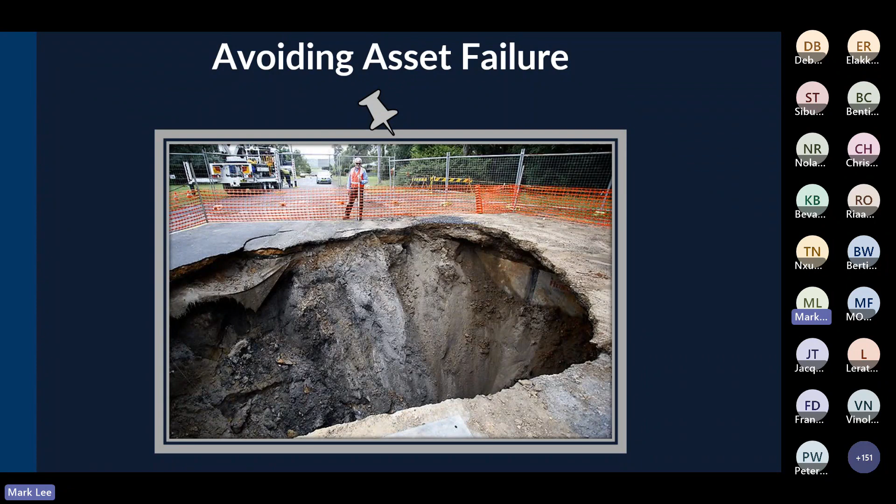In the past, engineers have often felt like they didn't have enough data to understand their assets, networks, and the processes that they were tasked with managing. What we've seen is a rapid development in hardware, capability, and communication options to bring data back in from the field faster than ever. We now have access to so much data that it's easy to suffer from data overload. Artificial intelligence can assist with its capability of rapidly processing large amounts of data, help make decisions, and provide advice.

A real-world example of data analysis and predictive modelling is having sensors installed in a pump control cabinet to capture, process, and relay detailed performance data. The example sensor here is one of the ones from the Dutch company Samotics, who work across a range of industries to improve predictive maintenance and reduce unplanned downtime across a range of assets.

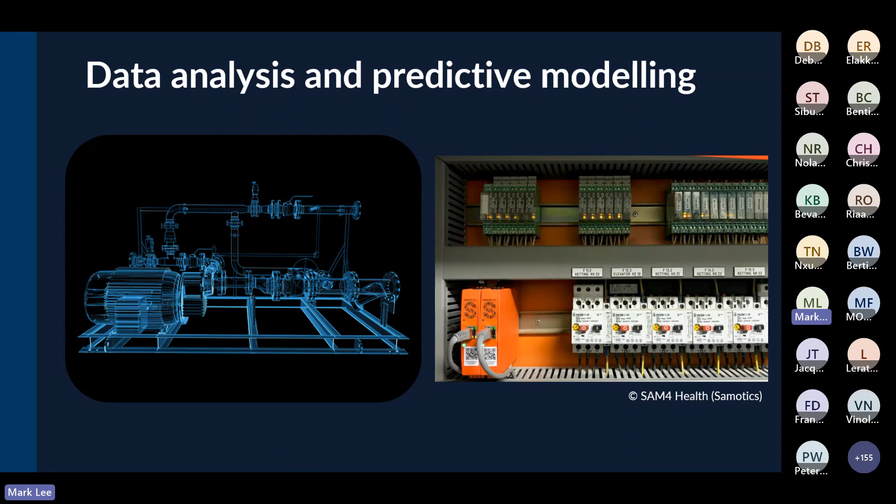Products like this look to build real-time pump curves, notify a failure, detect anomalies to auto-adjust pump control, and flag the presence of leading indicators of early signs of pump failure.

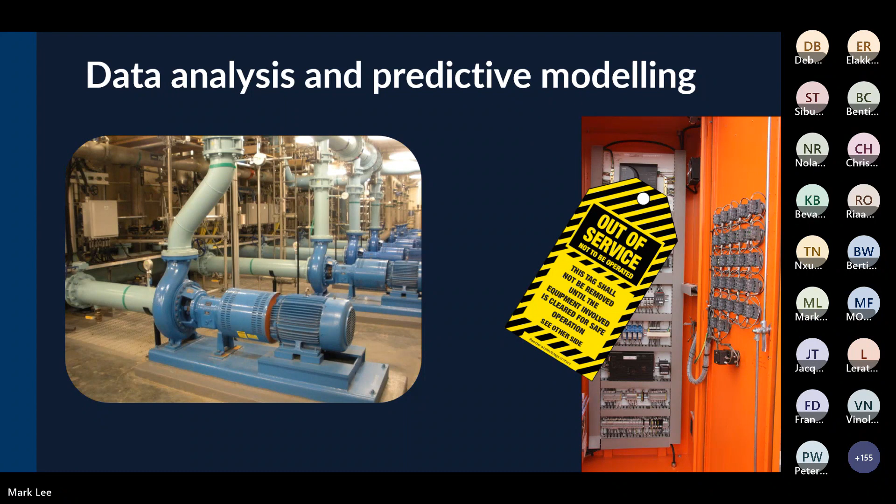The hardware to detect leaks in water networks through acoustic signatures has been around for many years, as has telemetry alarms that monitor sewer levels. But what has evolved in recent years is a reduction in the amount of time and resources required between an event occurring and turning it into a triage job that can be prioritized against other work.

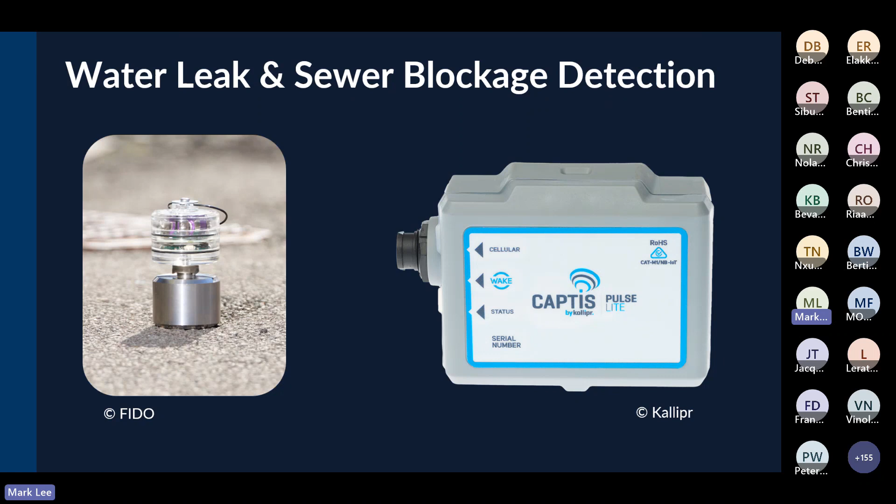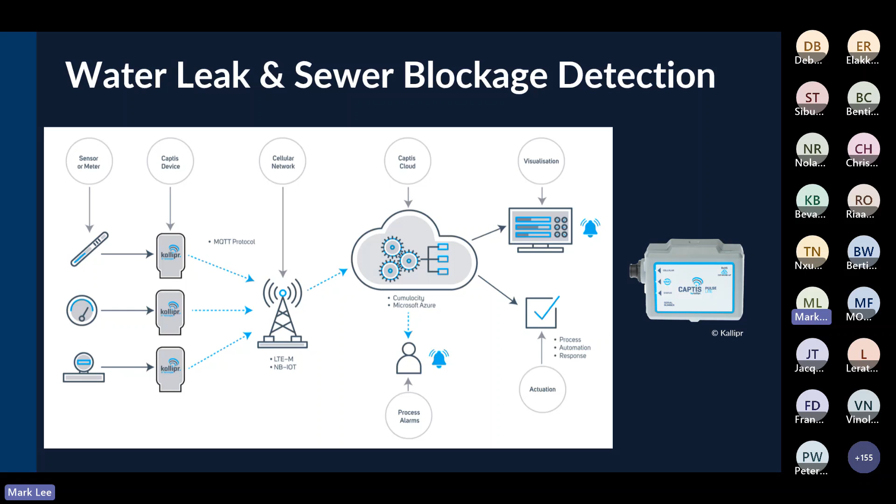The interactivity between different systems using cloud-based data storage, APIs, and defined workflow rules means organizations can now begin to create automated workflows that get crews out rapidly to the problems that need fixing first. The manual generation of paperwork and work orders is reduced, and there are opportunities for better results, including improved levels of service, environmental impact, and cost.

Artificial intelligence is being used to help refine and optimize digital twins of networks. This also includes the fine-tuning of water and wastewater treatment plants. Automation and AI is now able to help assist in the design of treatment plants as well.

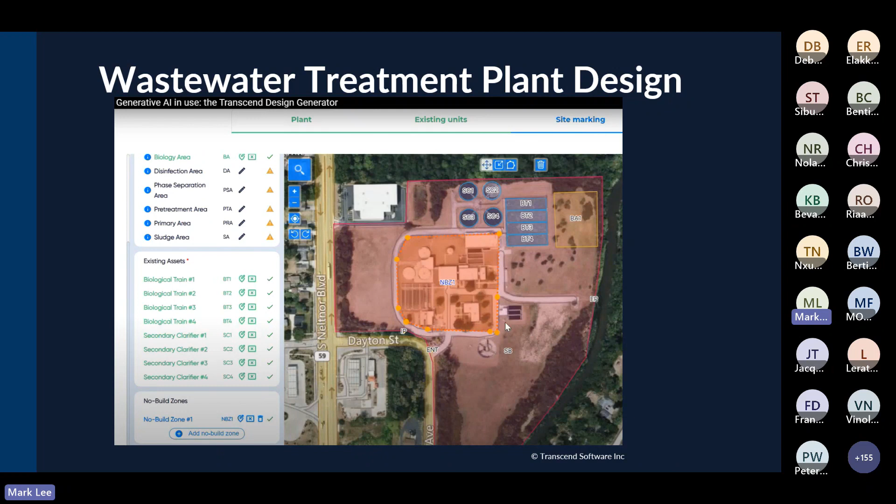This example is from a US company called Transcend, who are able to take process requirement inputs, including influent flow parameters, preferred treatment methods, existing processes, site footprint, and more to generate design documentation for wastewater treatment plant upgrades.

This image shows one of the interactive screens where users can mark out the inflow and outflow points, areas where there are existing assets, and the land where there may be no build zones or preferred locations for future build areas. Sorry for the grainy quality of this one here, I've just compressed it into a GIF for this presentation.

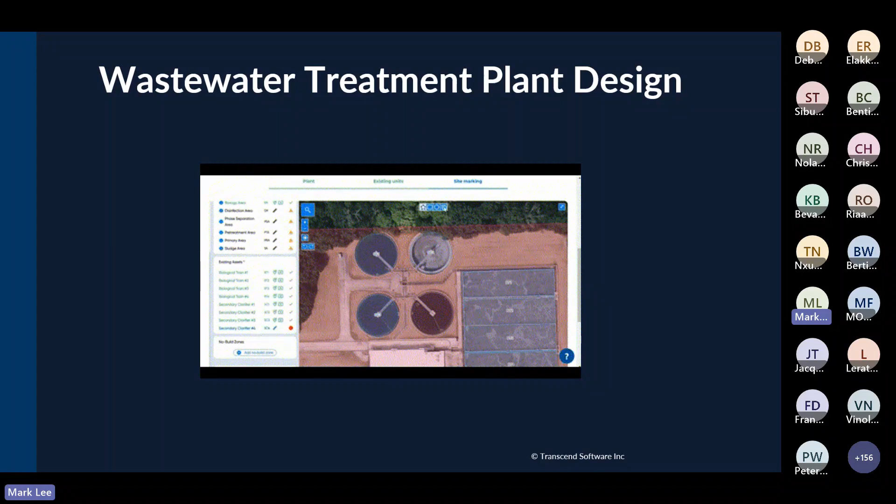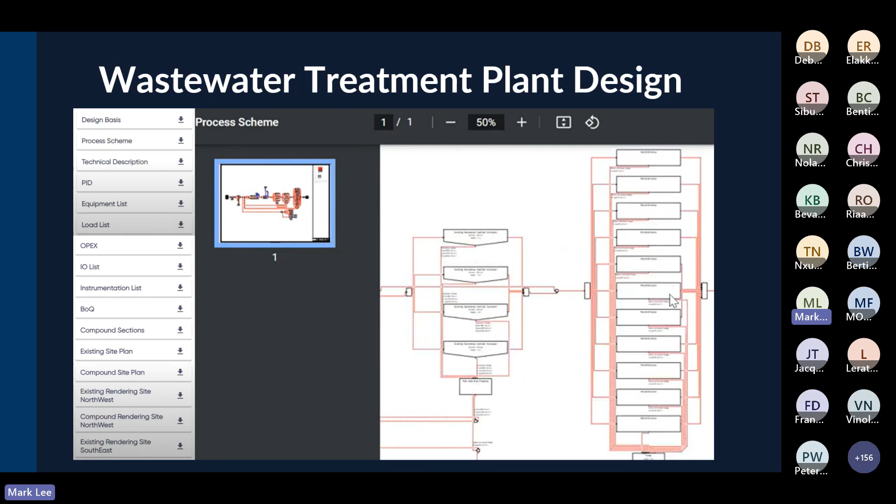The output from this type of design generator is a document package that includes a wide range of concept design materials, from process schemes and piping and instrumentation diagrams through to BIM models and AI rendering of the design, like we see on this slide.

My area of expertise isn't in process engineering. I've spent much more time managing network assets such as water distribution networks and sewer collection systems. So I'd like to go into some more detail on the asset management of gravity sewer assets and how I see AI fitting into this space at the moment.

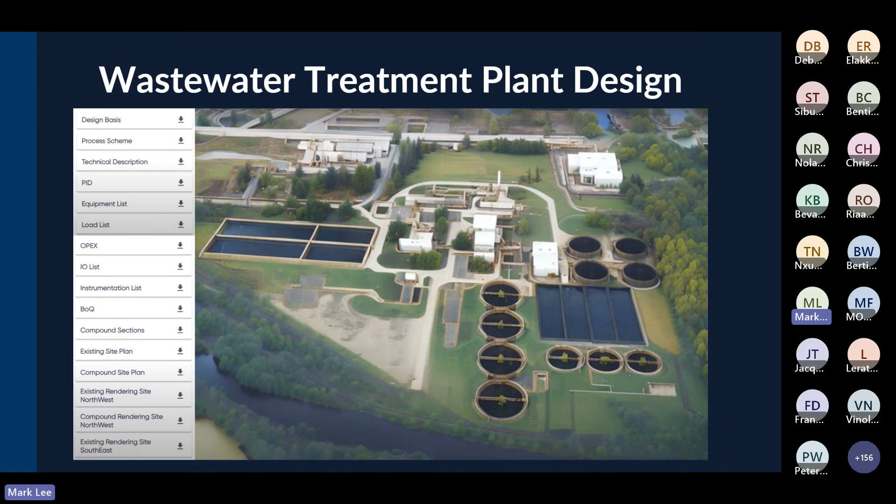Managing pipes that are in poor condition has often been split into two discrete components, often completed by segregated teams: the collection of CCTV footage and calculation of condition grade, and then making a decision and scheduling the maintenance or the rehabilitation of pipes.

A common barrier that we've experienced and seen is moving efficiently from this initial pipe inspection stage through to the action on the ground stage. The purpose of inspecting pipes isn't to get a condition grade in a report or watch a video. The purpose is to drive sensible asset management decisions on what to do with at-risk pipes and allocate budgets in an optimal way.

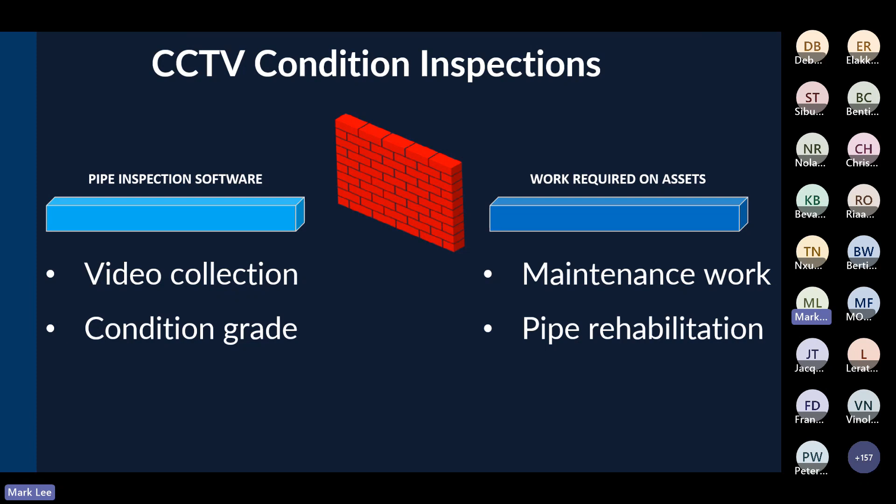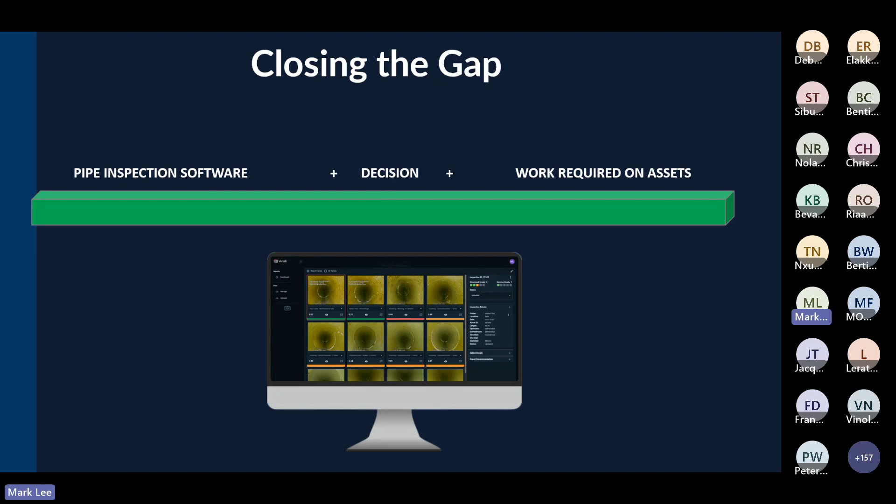AI can also help engineers with this task. VAPAR's cloud-based platform is designed to extract information directly from the video and pull data, images, and engineering logic together onto a single browser screen. It's designed so an engineer can view the condition of their pipe, make a decision, and prepare work packages using a fast, accurate, and more consistent approach.

It removes the requirement to sit through all of the long inspection videos before being able to reach a decision, and it focuses a person's time on the engineering tasks that really matter.

When speaking to people about artificial intelligence, there's often some curiosity about what's taking place in the actual AI model. It's not intended to be a black box or some secret process. We only need the video file itself to produce our results, and there's no need for the inspection to have any defects coded during the inspection. So let's take a look.

Upon upload, each video file is automatically split into a series of still frames. The AI analyzes each of these frames, and based on over 100,000 machine learning training images, it checks each frame for the presence of a pipe defect and then categorizes these results to align with regional scoring standards.

If we take a single extracted image as an example, it will be processed in the primary AI model that determines if a defect is present and then what category of defect it might be. The image will be passed to one of many different defect submodels, in this case the root submodel, which is tasked with classifying root type and magnitude.

The output of the processing will be an image with the label and relevant defect scoring applied. This same process happens for each and every frame, with the end result being all relevant images from the inspection presented, scored, and highlighted for the user.

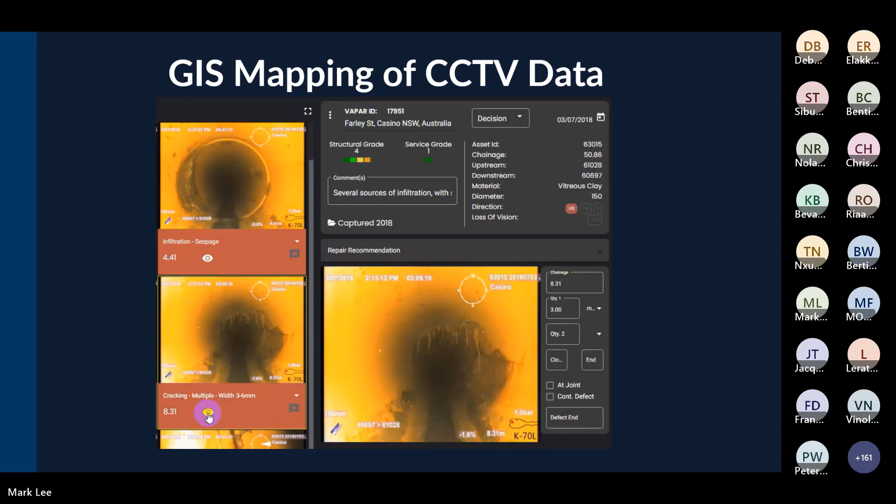This combination of artificial intelligence and automation is intended to drive optimal decision-making at an individual pipe level. It then flows directly onto a targeted program of maintenance and capital works.

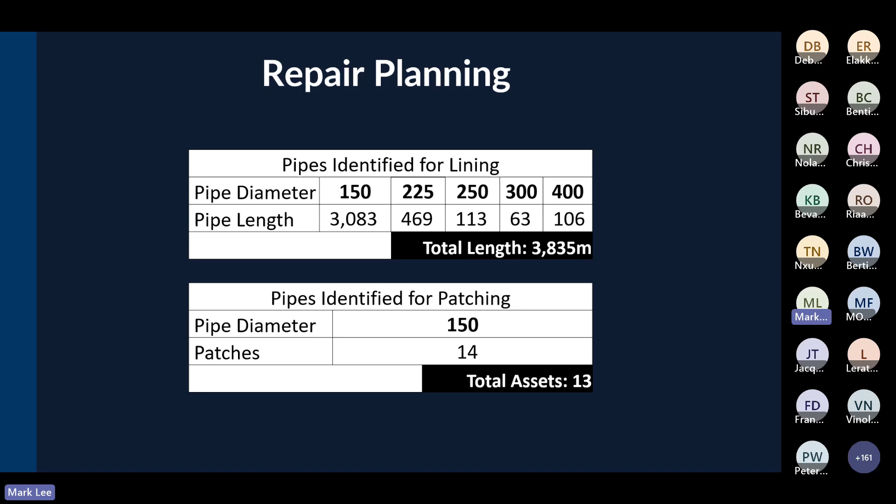It only takes a minute to go from the repair recommendations export from the previous slide to this repair planning scenario for every single pipe in the system that has been reviewed with a decision allocated. This example shows aggregated decisions totaling around 4 kilometres of lining work and 14 patches across 13 pipe assets for an upcoming work package.

Costing can be inserted into the repair planning based on the current schedule of rates if you have a civil works contractor or a panel, or you could use your last project's pricing or make some calls to arrive at an indicative budget estimate.

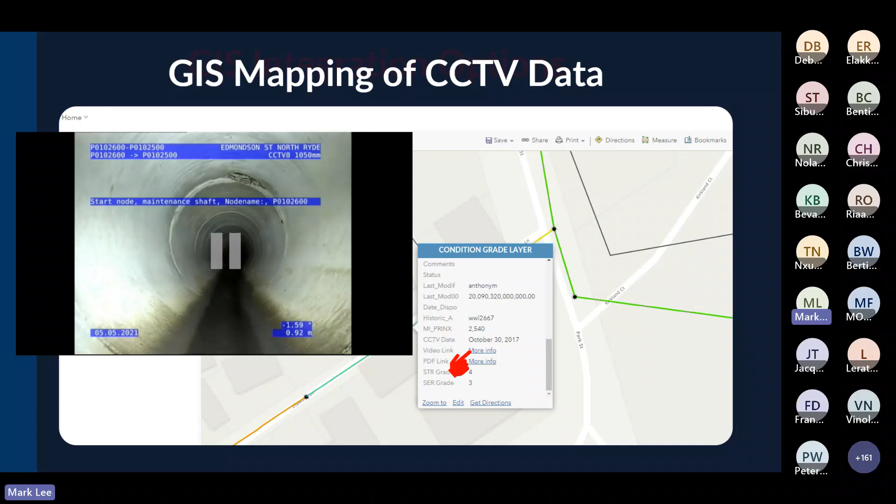While we don't have time to go too deep into thematic mapping of results, these results from VAPAR can be integrated into a utilities GIS platform. So the layer here shows which pipes have been inspected with information including date of last inspection and condition grades. Hyperlinks allow videos and inspection reports to be opened with a mouse click. The video is able to pop up in a browser window and play directly from the cloud storage location.

Other useful data that can be shared between VAPAR and an organisation's GIS is a point layer with the defects from every inspection and their location along the pipe.

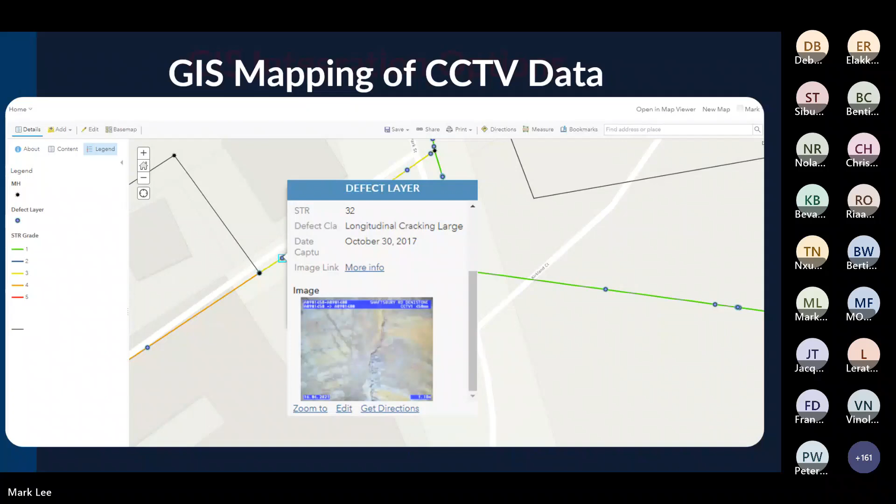So the world of pipes and pipe inspections also produces some pretty unique and weird situations. During our AI processing, we also come across all sorts of wild images. So we post on LinkedIn every Monday morning with examples of the strange and the weird that we find in pipes, and it's a light-hearted way to start each week.

So from here, I'll pass over to Elakkia, who is well qualified to take us even further into AI and how it fits into the sphere of engineering.

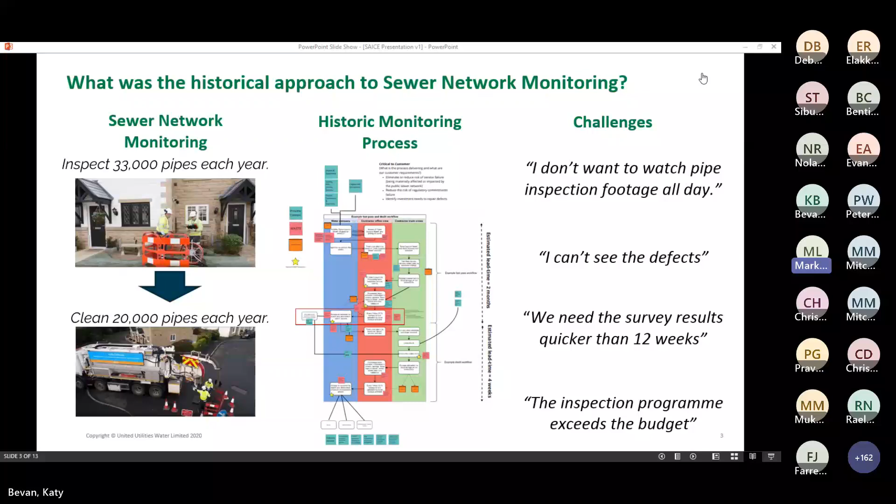Some of the challenges are... Katy, yeah, very sorry to interrupt, but there's been 3 or 4 people sharing that they're not able to see the presentation. I can see from my side. Oh, interesting, okay, so I just want to double check it. Have a look what we can do. Perhaps just stop share, reshare. It may be at their end, but I just want to make sure there isn't a large amount that can't see. Sorry, yeah, no problem, thanks for letting me know. Let me reshare, looks like it might have just been a couple. Yeah, okay, no problem, I'll reshare via my screen. Is that back for the majority? Yeah, we're all back up. Very sorry to interrupt you there. Excellent, no problem at all.

It's funny because you feel like you could be talking to yourself, so it's good to actually hear a human voice back. Okay, so some of the challenges - we don't want people sat watching pipe inspection footage all day, of which some of my team were doing for a large majority of their day. Obviously, that seemed completely nutty to me when I started this role. Couldn't believe that we were in this place where this was still something that happened. And also, additionally, they couldn't really see some of the defects that well.

Apologies if there's a little bit of background noise, but I am on a wastewater treatment work, so there's a lot going on around me, but I'll continue. So they couldn't see some of the defects, they weren't that visible. And also the process from on-site completion of the CCTV being carried out to actually understanding what we needed to do was sometimes taken up to 12 weeks. Depending on the risk there, that's way too long for us to wait and get that visual and define exactly how we can progress with that.

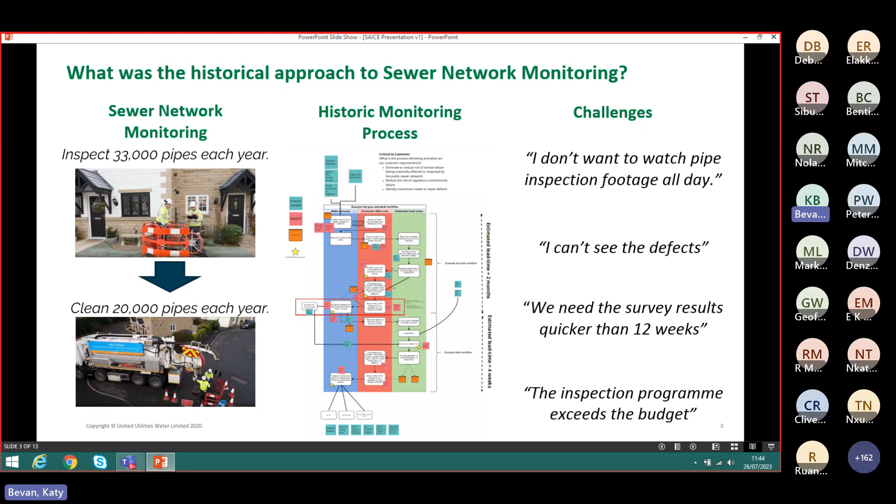Additionally, the inspection programme - I have a certain budget that I have to inspect all of my sewer pipes, and we were actually exceeding that budget year on year. So what ended up happening is that towards the end of the year, usually the last quarter, the inspection programme would sometimes just completely stop because we did not have the money to progress that. There was no risk element to that, no review of what the important pipes were within that quarter. It was just a cut-off period because we didn't have the money, which is absolutely not the way that we want to work things.

Okay, so Innovation Lab. I don't know if anyone's heard about the Innovation Lab at United Utilities, but innovation is core to who we are, part of our culture. What we do every year, and we have done for the past 6 or 7 years, is invite suppliers - smaller suppliers, larger suppliers - from every country across the world. There is no categorization of who can apply and who can't, it could be absolutely anyone. If you've got an idea, apply. And if you get through, you can basically use our data, our people, our systems, our assets, whatever you like, as a test bed for that supplier to understand how they can get the best out of their tech or product. And obviously it's a two-way street, because we're also getting the benefit of understanding and being first in line for that product and seeing how we can benefit from it ourselves.

The ideas range dramatically. We've had things like sniffer dogs for leak detection, which has been a massive success for us on the water side. And additionally, VAPAR, which came through our innovation lab about 3 years ago. Amanda mentions one of the CEOs from VAPAR, that the reason why she started the company was because she was one of these people following graduation who was sat watching CCTV pipe inspections and couldn't believe that that was the way we were doing things.

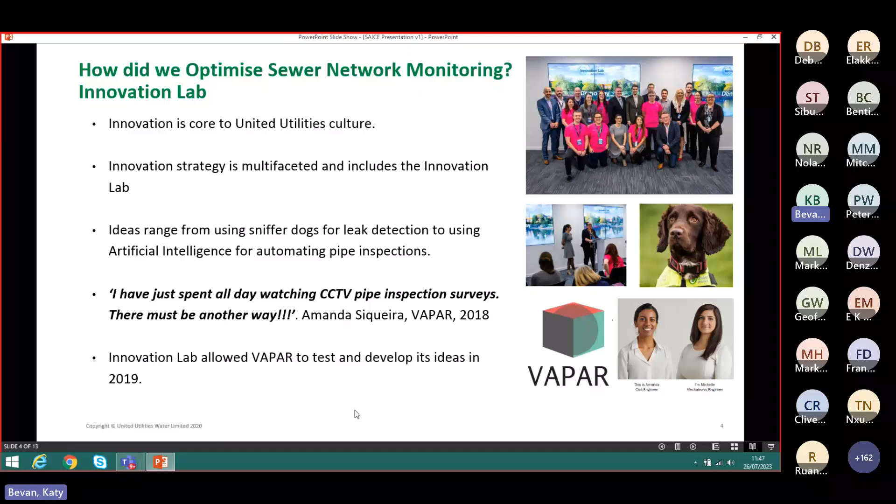Just a note on that as well, I don't know if it's the same across the globe, but we sometimes find that suppliers struggle to get into the water companies, so it seems like a closed door sometimes. They struggle to know who to contact. It's such a big company, who do we go to to get in there? The Innovation Lab gives us that perfect opportunity for people to come in, so it's something I really enjoy being part of each year.

So how did we optimize the sewer network monitoring with VAPAR? I know you've seen some stills from Mark around what the actual system looks like, but what the AI does for me is categorize the inspection footage.

Historically, what used to happen was we had the fast pass element where we looked at the sewer pipe, cleansed it, and then did a structural survey after the cleanse. The structural coding was carried out by one of my contractors, all done on site. There are so many different codes, so many different defect types, thousands to select from. There's a lot of opinion there, lack of consistency, weather plays a part in that, someone might be having a bad day. It was very difficult to understand the accuracy levels we were getting and that consistency.

Consistency is key to make sure we are correctly understanding our risk and managing that appropriately. I need to ensure the correct defects are being located in the correct locations, so we can ensure the right remedial activity is selected for that specific defect to resolve the issue properly.

So talking about how easy the system is for us to use - the mobilization is very quick, and from an output point of view we can easily extract a PDF report that gives really good visuals of the defects, what they are, and what the remedial solution is. We can then give that to our relevant engineers in our teams, who can put that forward for funding to get resolved. Don't expect to see all the detail here, but that was the old historic approach I showed earlier.

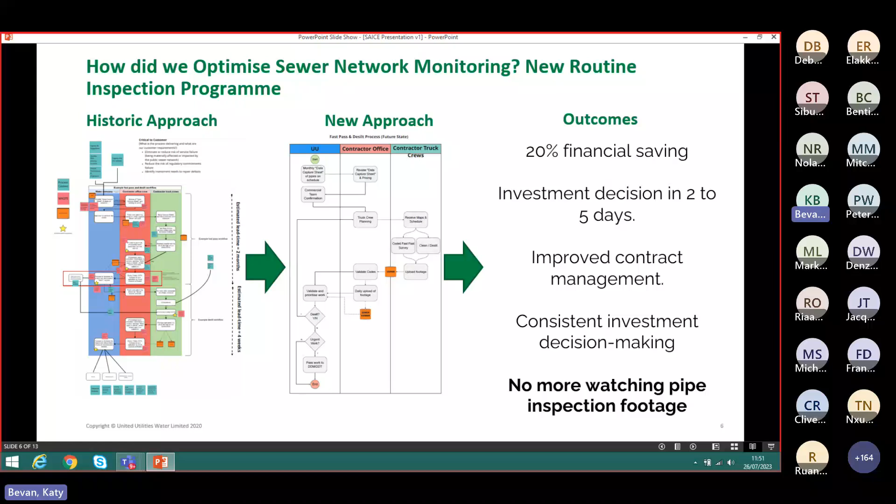And also we don't have to sit watching pipe inspection footage all day, unless we need to in specific examples. But generally we look more at stills that VAPAR is providing, and VAPAR removes the lengths of pipe that we do not need to look at.

And so we could then say, right, we're not doing anything further on my program. Let's send that over for investment or do a bit of investigation. Last thing we want to do is obviously make anything worse. We want to mitigate the risk.

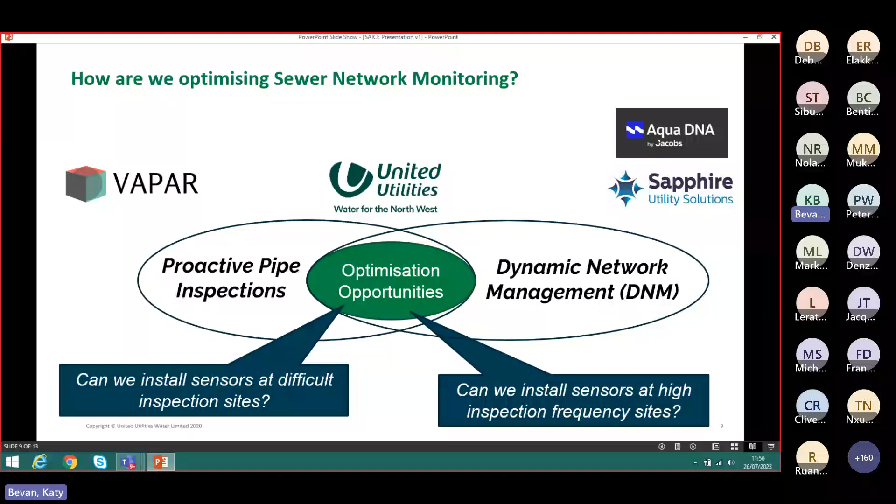It's about understanding how we can get VAPAR working with DNM, looking at the monitor locations and the AI. There are some locations we really struggle with in terms of getting access to clean, traffic management permits, customers. Can we install sensors at those difficult inspection sites? Can we also install sensors at high inspection frequency sites, so that potentially we can visit less frequently and save money, knowing there are eyes on that site if anything happens. And can we repair the blockage root cause, which could mean removing that length from the sewer cleansing program.

Just a little bit around DNM, which I mentioned. I think we're at a point where 17,500 sensors were installed across the region. We're now at about 19,000 sensors, I believe.

In terms of our reactive callouts, when there's an issue, there's 25% less on non-infrastructure and 10% less on infrastructure, that's our sewer network assets. We're getting 10% less reactive callouts and issues because of these monitors being in place, and we're able to get eyes on the network all the time, live 24/7. We're also getting 37% less wastewater customer complaints, which is huge for us, and there's a lot more proactive issues detected prior to an issue coming to a head. That's 5,000 of those over the time we've been working on the DNM project.

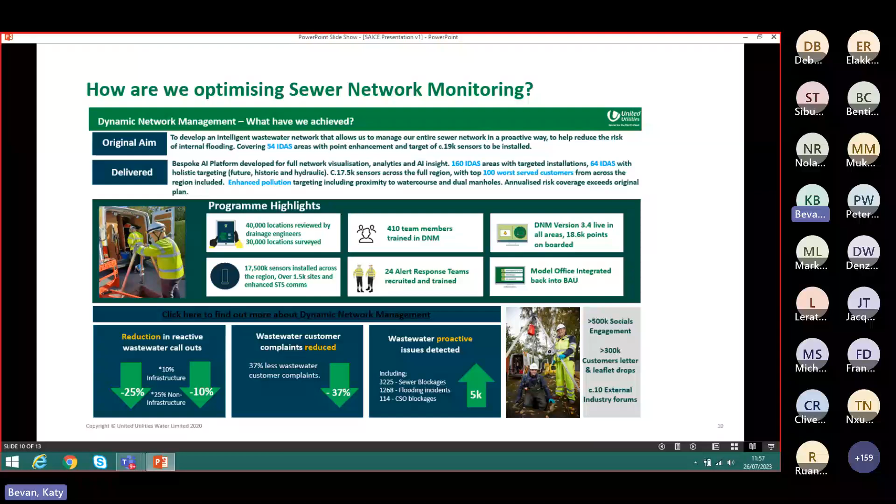What's next for us? Obviously looking at those capital programs of remedies, we've got all these repair recommendations. How do we package them up and progress to resolution? We're looking within the pipe now, but how can we start looking at what's going on outside of the pipe?

Looking at satellite imagery, Planetek Italia is just one company that offers that service, but there are others as well. How do we look at what could be going on outside of the pipe in terms of geography, what things are moving around that could be causing structural defects within the pipe, causing collapses and things like that before they happen? We're also looking at working with camera providers to see if we can put the AI within the actual camera technology, getting to a place eventually where the camera will stop or slow down itself when it comes to a defect, instead of someone having to operate that. All these sorts of things are what we're looking at and working through.

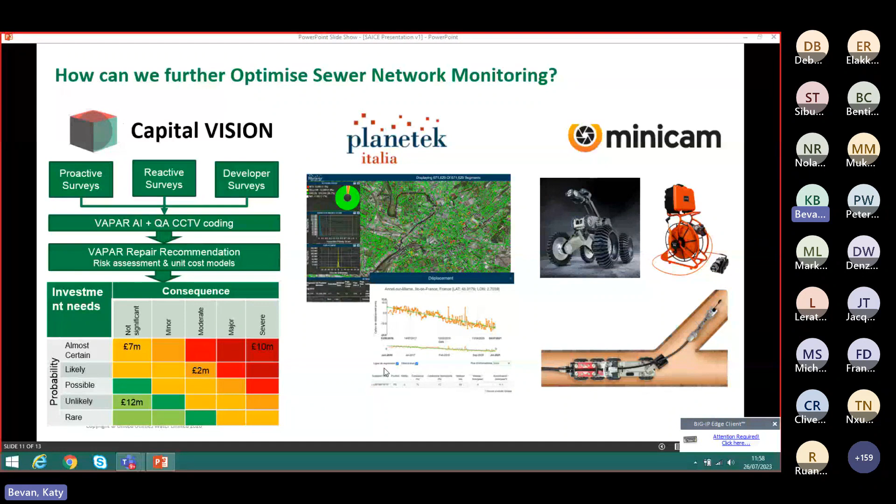Putting all of those things together, DNM, satellite monitoring, VAPAR, and also what's next going to come through the innovation lab. Applications have just closed for that, so we're intrigued as to what's going to come next and how we can work with them. Those are all the different optimization opportunities that overlap each other.

So in summary, the definition of insanity is doing the same thing over and over and expecting different results. We're very aware of that. We know we needed to change, and we're really excited about it, proud of the achievements we've made so far with this partnership, and looking forward to what's next. The innovation lab was huge for us in providing this system and tech, which gives us a more efficient network management process. We also know that the introduction of DNM, the monitors, and other technologies will allow for further optimization. That's me, so thank you very much.

Thank you very much indeed for a really good presentation. Thank you to Mark for his extremely good introduction, and also to Alekia for the AI portion, explaining the background of the AI and the different parameters that you have, and also to Katy for giving us a really good in-depth view of how the technology is actually being used practically. So I think the main thing I took out of that was the fact that collecting the data is one thing, which is relatively easy, but then what do you do with all the data? You've got to analyze it. This goes across all sorts of aspects - we can collect data, but the data itself isn't any good unless it's analyzed correctly. So I think this was a really good example of finding we have technologies, but then finding a very, very practical use for those technologies. So thank you very much to all three of you.